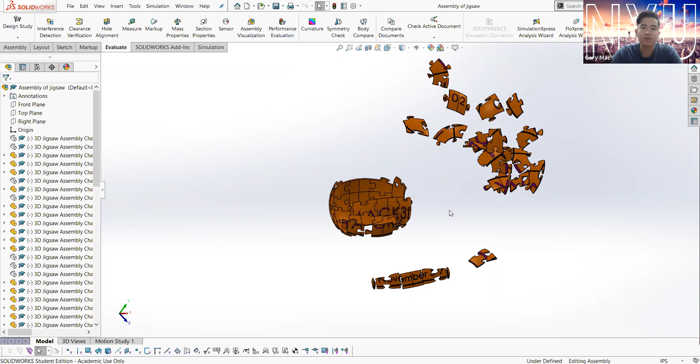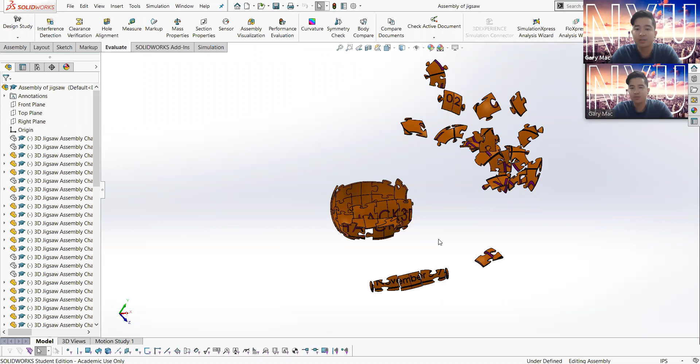The idea behind this, and the idea behind the research, when we have to brainstorm new ideas for security features for 3D printing, or for CAD, for design: when we're brainstorming these new ideas, in general one thing we have to do is keep an open mind and be really creative, and make sure that every idea you have, you don't dismiss it because you think it's a bad idea, or you don't think it's going to work out. Every idea during the brainstorming process is good and should be tested to determine whether it's good or bad, and not dismissed early on when it's just a thought.

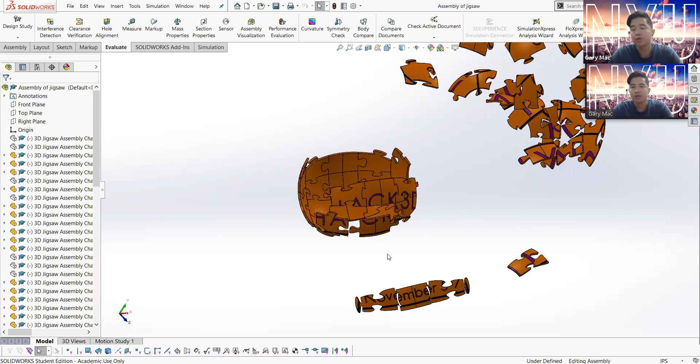So the idea behind creating this security feature, and the creativity behind it, is: what if we take two completely different things that have no relation to each other and combine them together? This idea came up because of the pandemic, and one of the hobbies that many people, like myself, probably picked up is jigsaw puzzles. So combining the idea of a jigsaw puzzle with a CAD model to create this 3D jigsaw puzzle. I looked for examples similar to this on the internet, but wasn't really able to find much, so this was a pretty new idea.

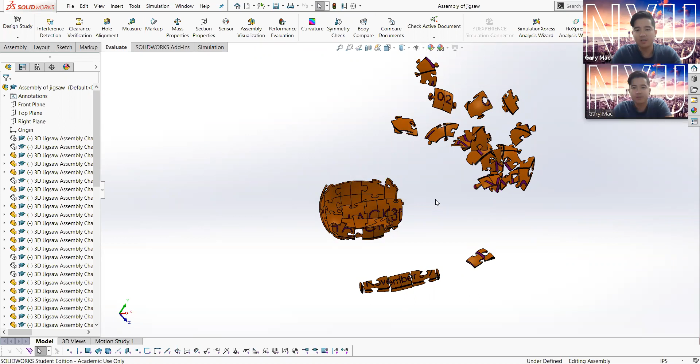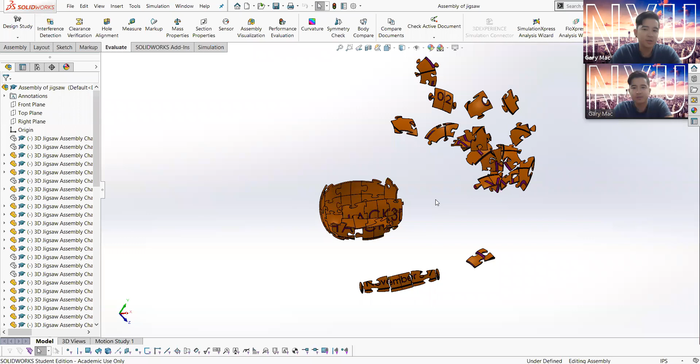This brings into the idea of, if I'm a designer and I've designed my part and save it to my library, every time I save it, an algorithm or software takes my CAD model and breaks it up into many different pieces, maybe 100, maybe 1,000. If someone were to steal my file, what is the likelihood of them being able to put it back together and retrieve that design information?

So that could be one possible idea for a security feature. And for this challenge, there really wasn't any trick or fast way to do it. It would just be similar to piecing together a physical jigsaw puzzle, but everything is done in the modeling realm.

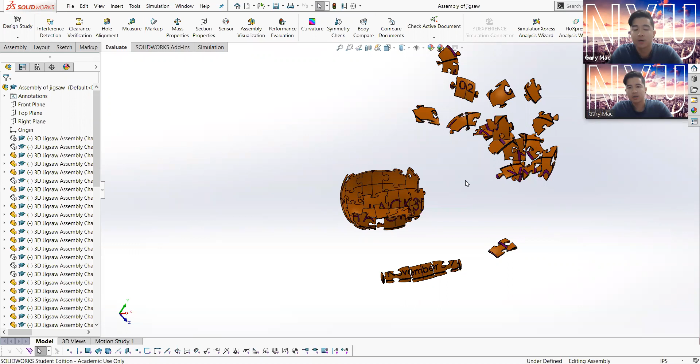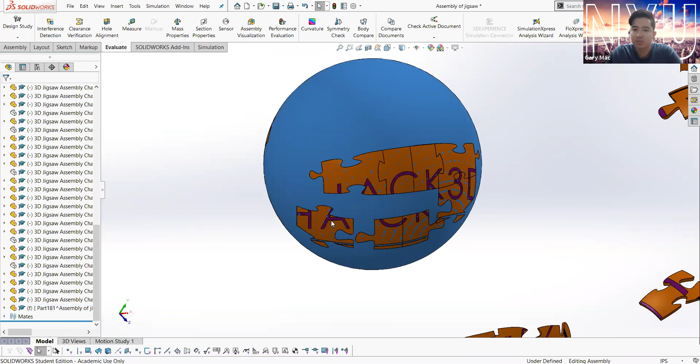But there are things that can be done to help with the jigsaw puzzle. Knowing that this is a basketball, one of the things you know is that it's a spherical shape, and there's a certain standard diameter to a basketball. So what I can do is generate a spherical surface with the circumference of the basketball, which is about 29.5 inches. This gives me a good reference surface to place all of my jigsaw pieces onto.

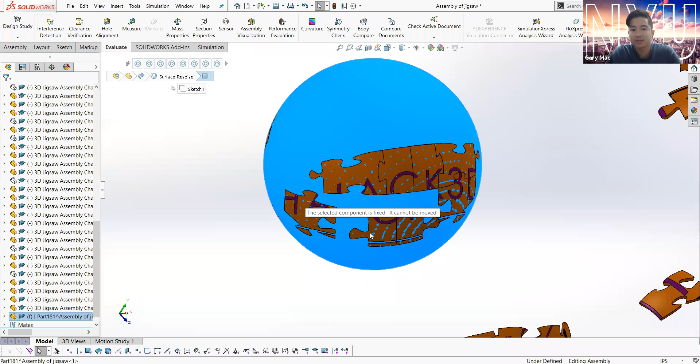So that's exactly what I did. I just created a reference surface, which makes it easier to place pieces onto, so it's not just freely floating in space, it's right on the surface. That's one little trick that could have been done to make it a little bit easier, so you're not just piecing it in random 3D coordinates.

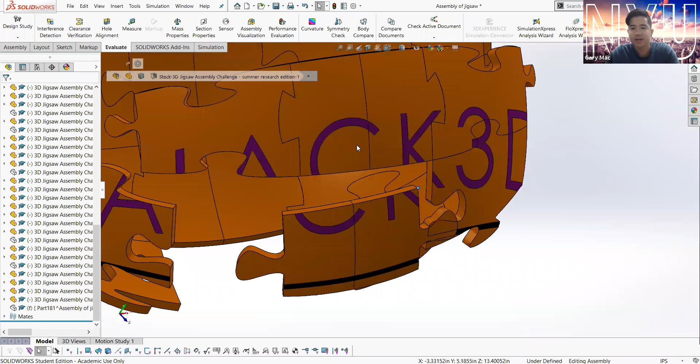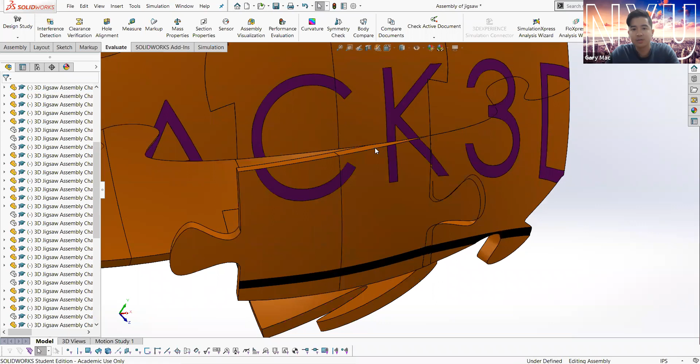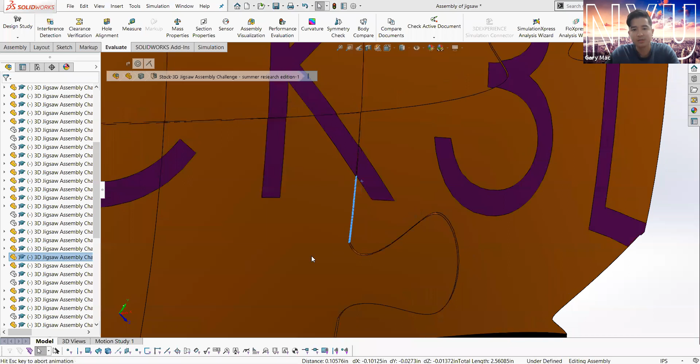Once you've captured that, it's just a matter of joining the pieces and finding the right matches together. Personally, I like to take the two vertices and join them together. Then, once you've joined the vertex, you can grab two edges and join them. Grab them, join them together, and you're slowly piecing the basketball together.

So that was the idea behind that. It brings up the question: if we need to protect our CAD information, can this be a reliable method? In this case, the basketball is just a simple spherical shape, but if everybody looks around at an object near them, and imagines that it's broken up into many different pieces in CAD, can that be used as a security feature in the entire digital additive manufacturing process chain? So that brings in that idea.

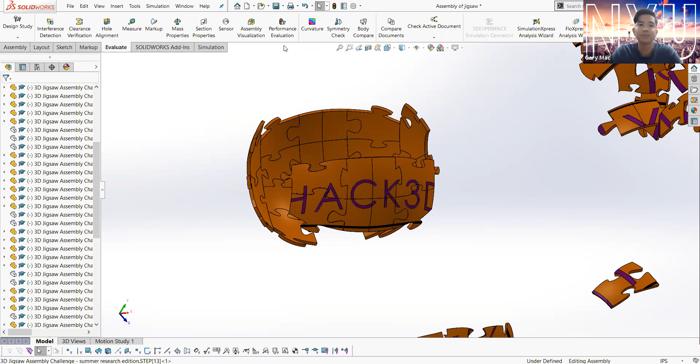So with the jigsaw puzzle, it gets completed. The final result looks like this. There are letterings on the basketball to aid in the jigsaw puzzle, in Hack3D.

The next challenge is the color challenge. The idea behind this is, let's say I want to send a message to Hammond, and for this message, I only want Hammond to be able to read the information in it. I don't want anybody else to know the information I sent to him. So perhaps I'll text him, and to protect that information, everybody has, in their smartphone, the option to apply a password-protected code, or they can only access the text message with a fingerprint, accessing the smartphone.

So this idea can also be incorporated into CAD as well. If I have sensitive design information, maybe I want to simply hide it from plain sight.

If I open the model, I don't see it, maybe it doesn't come to my mind. So with this challenge here, the color code, there are 5 different colors, and maybe the first thing that you would try to do is try to find a pattern.

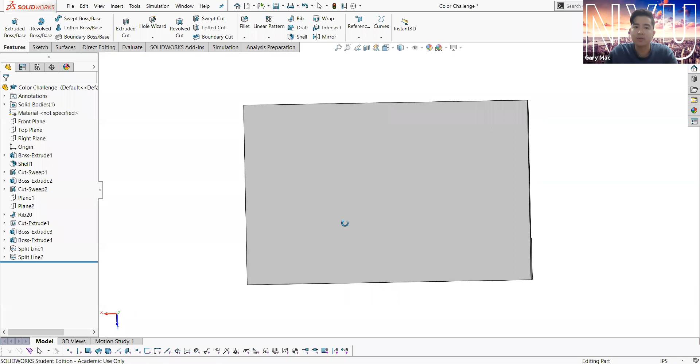But with a little bit of digging into the model, the trick here is to look at the back of the part and understand that within the part, if I just take a cross-sectional view and dive into just a little bit within the model, inside is actually hollow, and there is a secret message.

Each letter from this message is color-coded, and the color depends on how often that letter appears in the message. So for example, letters shown in red appear only once. Letters shown in blue appear twice.

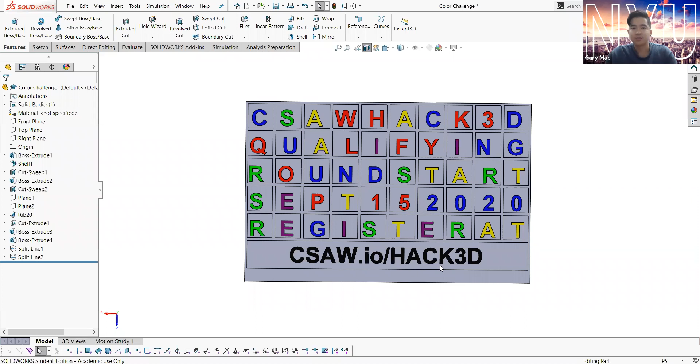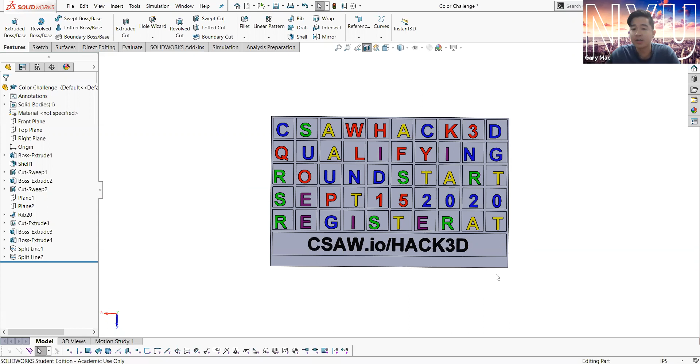So if you were able to come to the secret message, it will tell you: qualifying round starts September 15th. We can register at the site indicated. So this brings into the idea of these kinds of deciphering, decoding, hiding from plain sight, using these ideas to try to come up with a brand new security method for additive manufacturing.

So now that we know the pattern, we can simply apply the color and get the actual code within it. So that is the color challenge warm up.